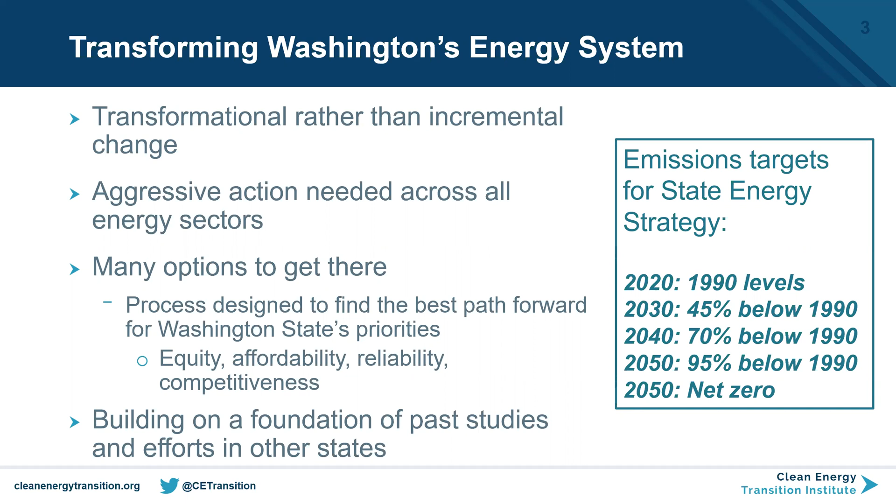It's building on a foundation of past studies and efforts in other states and also in the region and in Washington State itself. And we're using what we think are the best tools to try and explore this problem going to such aggressive targets in the future. The approach that we're taking is using conservative assumptions about existing technology from public sources. So our design philosophy there is not to be trying to factor in a lot of different technologies that are unproven or we think may come down the pipeline in the future. Instead, we're taking projected costs of technologies that exist today and using those to forecast what we might invest in the future.

We're exploring how Washington can achieve deep decarbonization in all energy sectors. So this is looking across all of those traditionally segregated or siloed sections of the economy in terms of planning, and thinking about this holistically. What do we need to prioritize? What do we do in different areas of the economy? We're using an optimal investment model. So how do we minimize costs while meeting the objectives of different scenarios?

And we are looking at the model interaction with other states. So how does Washington make decisions in the context of the Western region and in the context of the West making moves themselves towards deep decarbonization or high renewable systems?

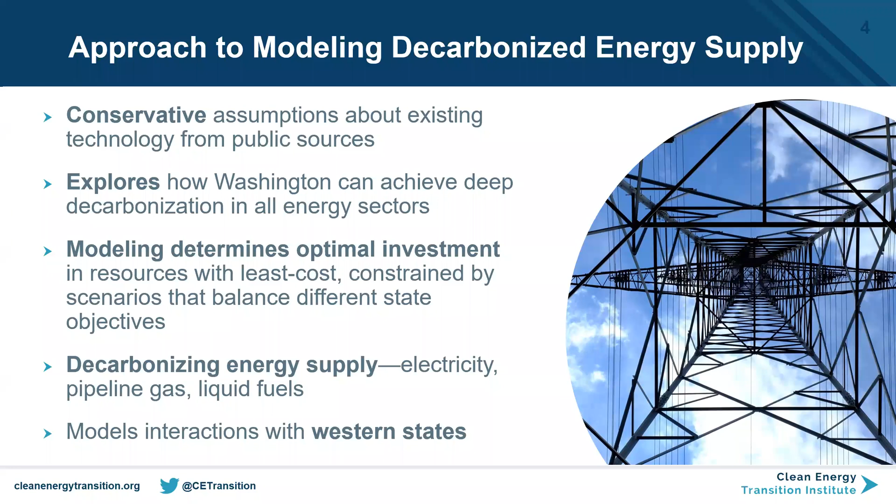There's a lot of studies that have already been done in decarbonization, both in the US, in the Northwest, in Washington, and internationally. And this has been a process of development of understanding the different elements of decarbonizing our economies and learning from that past work on what types of strategy might be appropriate to get to these goals in the future while meeting the objectives of different planning entities, of different states, of different countries.

What we see when we look at the literature out there, and the Clean Energy Transition Institute has a review of 58 different studies. Jesse Jenkins at Princeton reviewed 30 different studies, and subsequently there have been a number of studies done since those reviews. What we see across all of them are commonalities in the types of strategy, the types of action that we might take to achieve decarbonization in the future. Just looking back from Jim Williams' paper published in Science in 2012, energy efficiency, generation decarbonization, and electrification were three key pillars of reaching a decarbonized future.

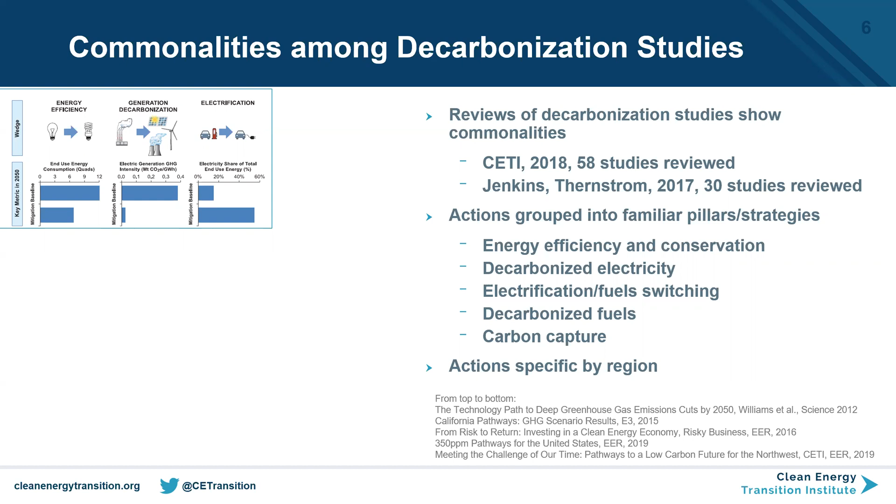California E3 GHG scenario results in 2015. We see the same sort of pillars identified there as well. Efficiency and conservation, fuel switching, which is a broader term for electrification, decarbonized electricity and decarbonized fuels. Then Risky Business study in 2016, we see the same thing. The 350 ppm study looking at how the United States might get to 1 degree warming by 2100. Again, those same pillars, but with carbon capture now.

And then for the Northwest, the Northwest Deep Decarbonization Study, we see the same kind of pillars, the same strategies coming up again. So this is something that across studies, there's some relative agreement about the areas that we need to focus on to get to these decarbonization goals. But depending on the region, the focus changes depending on what the resource potentials look like, what policies look like, what loads look like, and how we expect those to evolve over time.

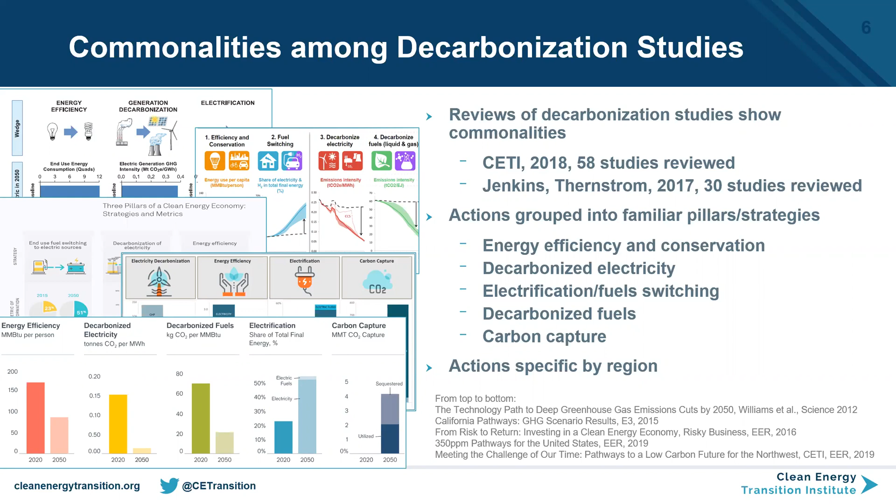So reviewing the planning framework, this is going to be material familiar to people that saw the previous workshop presentation. Why model the future energy system? What value is this giving to us when we're thinking about developing a state energy strategy?

We're developing a tailored analytical approach for Washington State, looking at least cost energy system planning and policy action design. And those really complement one another, because the least cost energy system planning can guide the policy and action design, making sure that we are on the right path towards that future that we want.

One thing that I think is often misinterpreted in this type of definition is least cost. I think that people instantly go to thinking about this in terms of, okay, we're throwing out everything apart from our economic objectives here, potentially at the expense of other objectives in the state or in the country. Really, least cost is a definition of what the model is doing, but the process itself is looking beyond that. What we're looking for here in developing the scenarios and running the model is the best path as a balance of different, often competing objectives. And not all of those objectives can be quantified in economic terms.

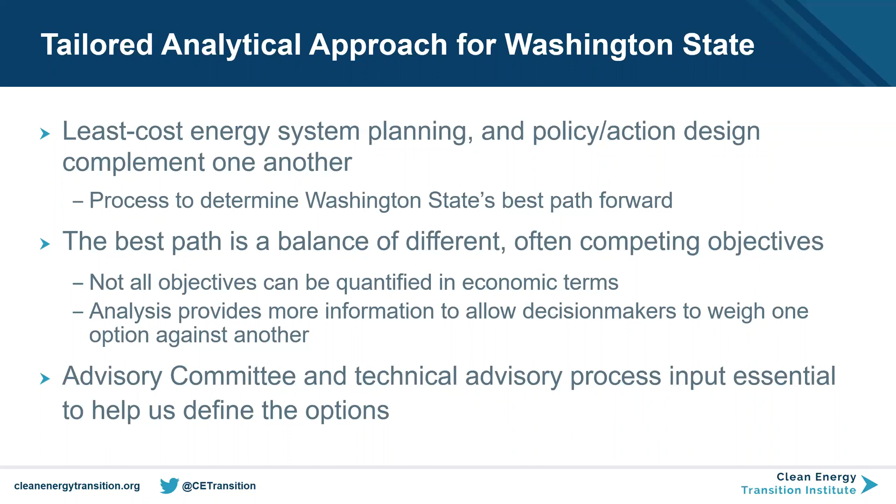And this is where the advisory committee and technical advisory process is essential to help us define the different options for the state and define those scenarios that we want to explore that are going to best inform policy and action development.

There are three framing questions which help orientate us to what's going on with the model, what's going on with policy and action development. The first is, where are we now? So where are we starting from? What is the current state of Washington's energy system? Where do we want to go? So from here, the jumping off point, how do we then move to our emission reductions goals in the future? What's the most desirable pathways to meeting those? And then finally, how should we get there? So once we've looked at what those pathways might be, we can think about what policies and actions might get us to where we want to go.

So starting from where we are now, we have Washington's current energy resources and infrastructure, and that includes the stock of all energy producing and consuming technologies in the region, patterns of energy consumption, final energy demand of fuels and electricity, the electricity system itself, all of the resources, transmission, and then fuel prices and fuel sources. And then we have policy as well, existing policy and targets through 2030, through 2050. The Clean Energy Transformation Act being an example of one of those for Washington that are already setting out goals for us to achieve in that time frame.

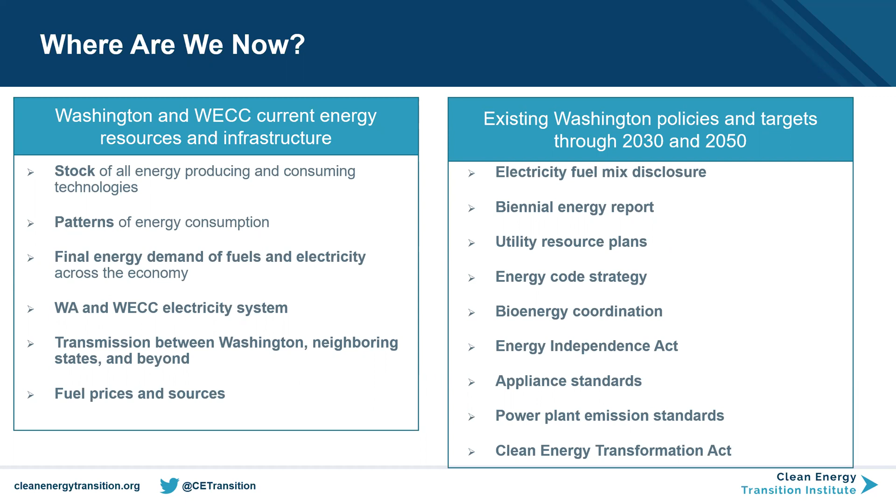Then how do we get there? This is the interfacing of modeling with the near-term on-the-ground actions we actually have to do.

Sorry, you just faded out entirely there. Okay, keep going. Can you hear me okay now? Yes, but it goes in and out, but keep going. I can try switching to a different microphone. It might be worth it. Hold on one second.

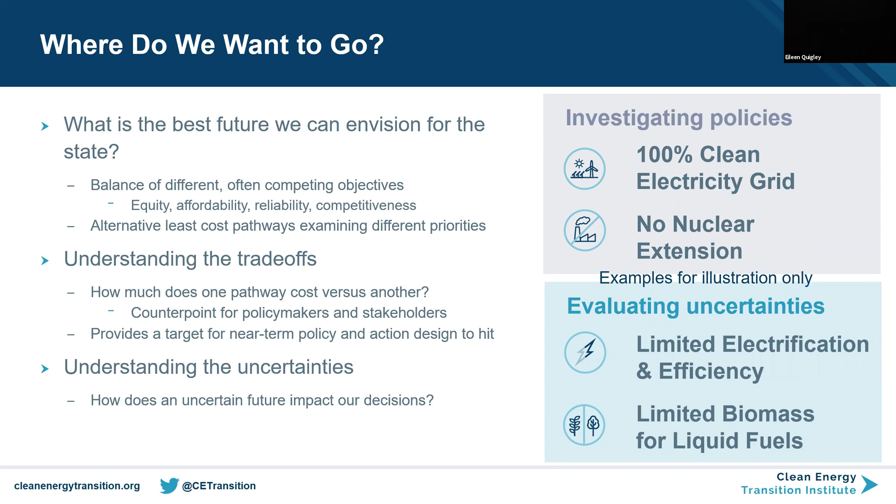The consumption patterns of the state as a whole are aggregated in our model. We're not breaking out different transmission zones, for example. But what we are doing is capturing the state as a whole in terms of technology stocks and how those will evolve over time. So if there are differences in energy consumption by region within the state, all of those are taken into account when we're building the demand for electricity, gas, and petroleum products in serving the economy.

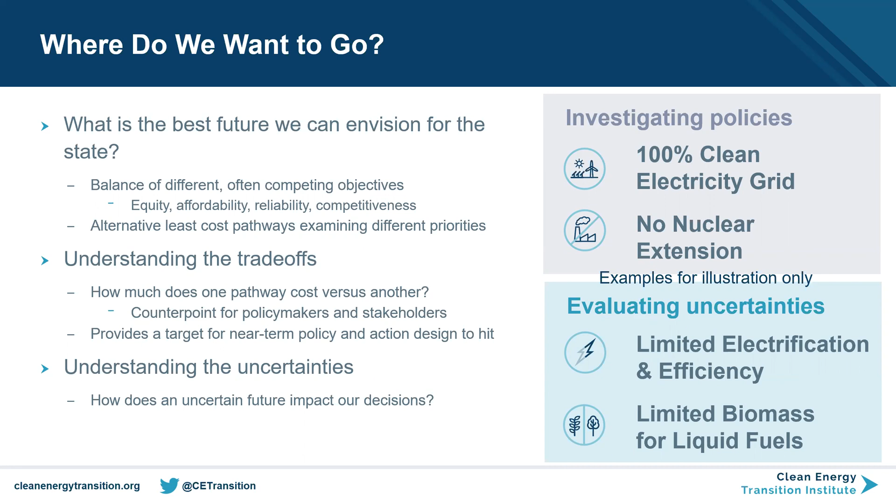Okay, let's go forward, and we'll add some more in a bit when you take your next break. So the next section here is the 10,000 foot view of what we're trying to achieve and what is the process we're following with the model.

Taking the very high level view here, what we're doing first of all is modeling Washington's economy. That's the first bucket, where we have residential, commercial, industrial, and transportation demands for energy. In this bucket, we're looking at the bottom-up stocks of all energy consuming technologies in the economy.

Your audio just paused, so repeat what you just said please. Can you hear me okay now? Yes. Okay, so we're taking a bottom-up approach of every energy consuming technology and unit of that technology in the economy to build up a picture of how much we're consuming today, and then using forecasts and assumptions about how those stocks will change over time to get a picture of what we'll be consuming in the future.

We'll get into this in the data sources section, but we're making a bunch of assumptions here about what kind of technologies people will replace their existing technologies with as they burn out. So when your water heater burns out, what kind of new water heater do you replace it with? When you're buying a new car, what kind of new car do you replace it with? That gives us this evolution of energy needs in the economy.

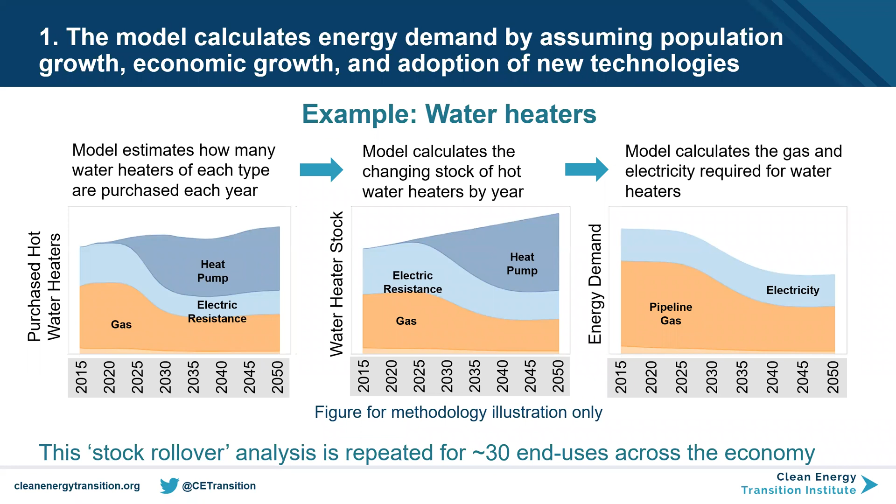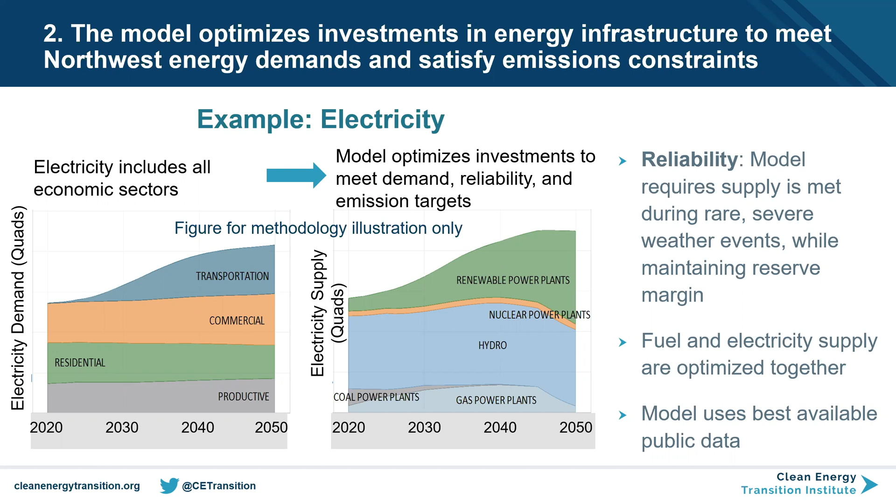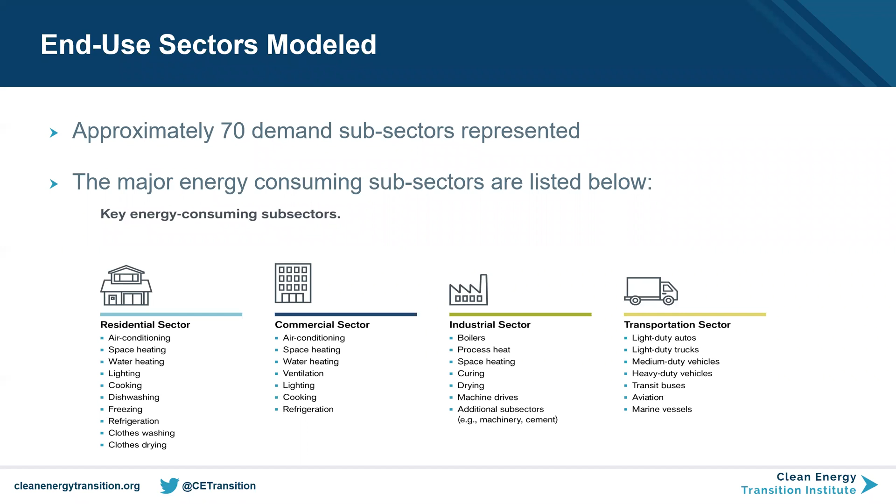The 70 demand subsectors include — well, we have a full list of them at the end of the presentation for those interested, more as a reference. But the major energy sectors are shown here for residential, commercial, industrial, transportation. On the supply side, we're looking at a variety of different resources we can invest in. A simple list of example technologies is shown for thermal: gas turbines, gas combined cycle, gas with CCS, renewable resources, energy storage.

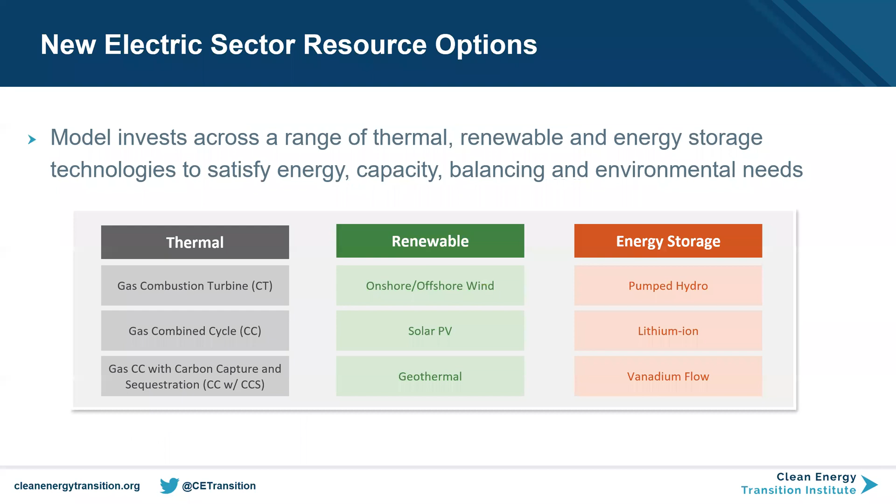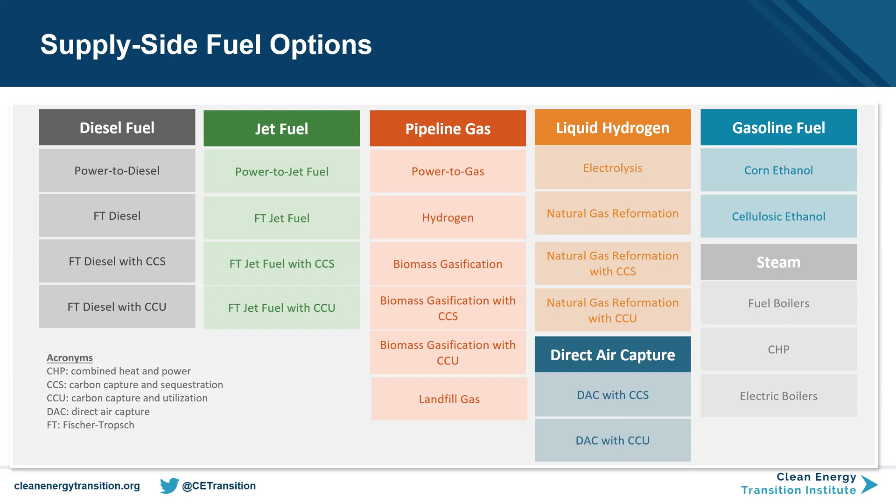Supply side fuel options fall into these buckets: diesel fuel, jet fuel, pipeline gas, liquid hydrogen, gasoline, steam. All of these have options for clean types of fuel and fuels that can be created either from biomass or synthetic production from hydrogen electrolysis in the electricity sector. We'll get into more detail about how this all links together in the next section. So I'll stop there and take any questions on that high level overview.

Okay, so from an anonymous attendee: energy resource planning at a macro level often assumes away the fact that resource decisions are made at the level of the firm, and often include previous investments. Will this be included in this modeling effort?

So this is also something that in running our models, we're kind of bypassing that step, but it's also intentional in that we are not trying to simulate the investments that would be made in a current market. We're trying to model least cost investments in different types of technology based on their costs alone and their optimal operations together. And it may not be the case that existing markets, existing incentives will produce a least cost outcome or a decarbonized future.

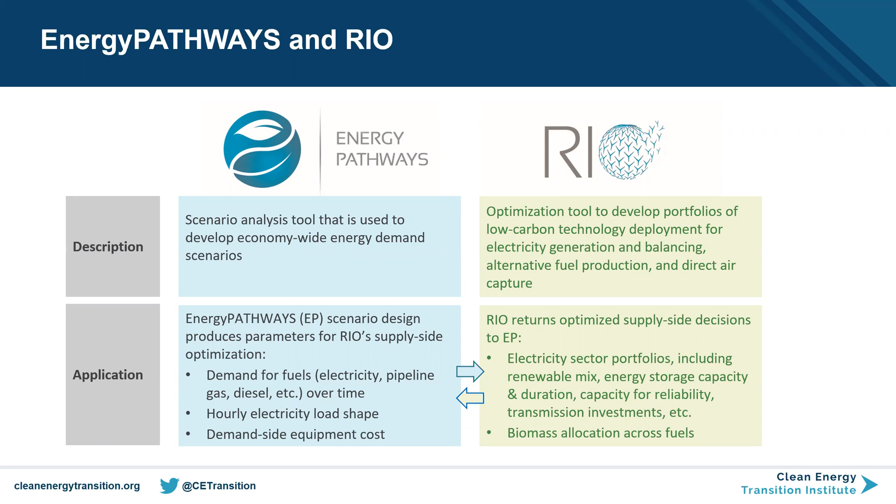To get realistic solutions to decarbonization in the future, looking at decision variables and outputs, we model on an hourly, daily, and annual basis, all part of the same optimization model, because these temporal frames are what's important for capturing the dynamics in the system and developing a least cost resource portfolio. Hourly decision variables include generator dispatch, transmission flows, operating reserves, curtailment, and load flexibility.

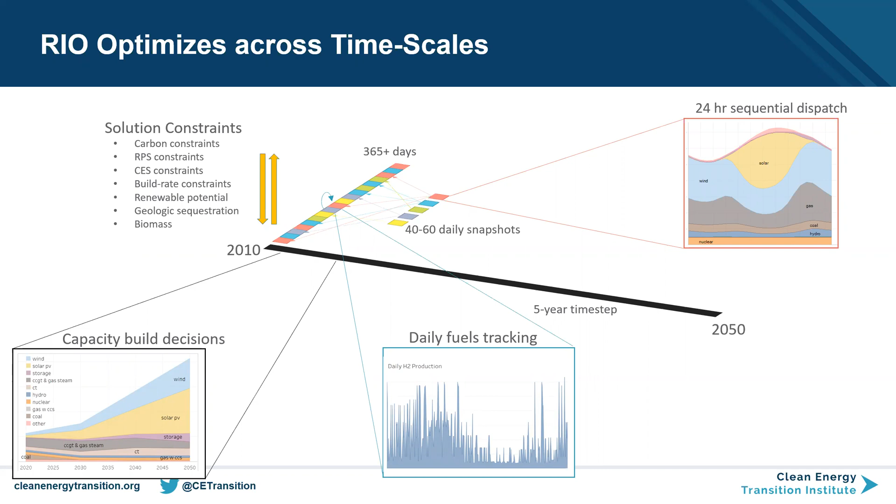We're also looking across geographic granularity as well. We represent each state in the West, the transmission constraints and potential for transmission expansion between those states, as well as the cost of doing that expansion. And then by state, we have load, resource, and new resource potentials according to the conditions of that state—the weather conditions, the climate, the loads.

So it captures the unique geographic advantages and local conditions that allow us to potentially get geographic diversity, taking advantage of, in the West here, excellent solar resource in the southwest and excellent wind resource in the north.

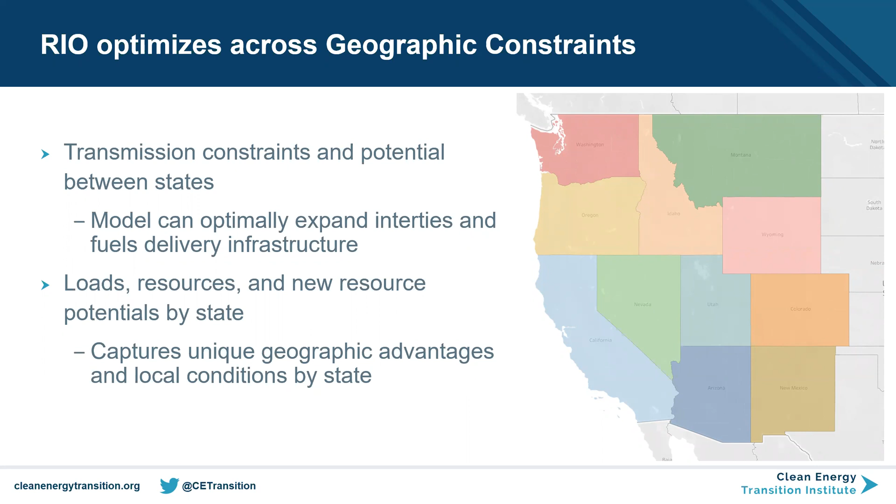We have flexible load operations. There are a number of technologies we can install in the future, replacing those that are burning out over time, that have flexible load capabilities. One of them that is very valuable to balancing the grid would be industrial boiler loads that could be shifted a little bit over the course of the day.

On the left-hand side there, we have a delay-advance flexible load shape construct, which is typical of characterizing a daily flexible load resource. This is converted into cumulative energy constraints, where we have an envelope on what we can be producing, either more or less, during every hour.

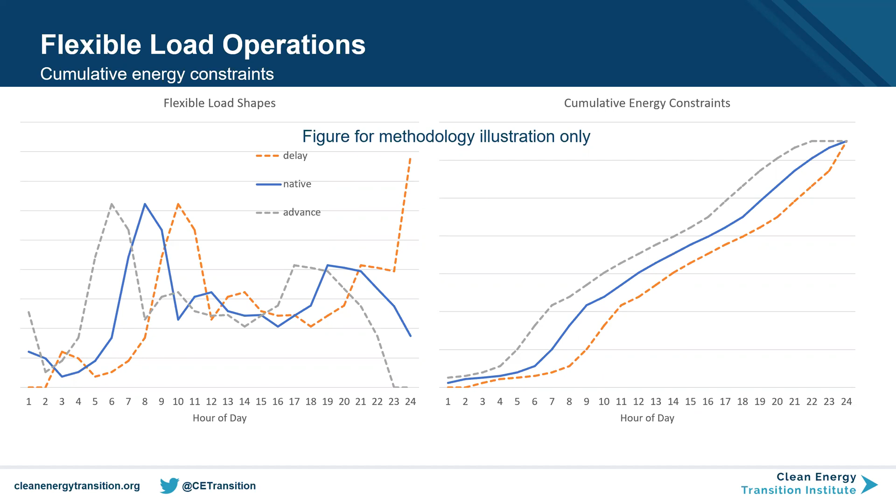And we have to meet that same energy budget over the course of the day. This is also true of longer term resources as well. We develop this flexible load envelope, and then economic generator life cycles.

If the generator comes to the end of its life, it could be economically retired by the model along that timeline. But if it gets to the end of its life and there's an option for extending the life of that resource with additional investment, then as long as energy capacity AS is still higher than the cost of that life extension, the generator will continue.

There's also the option of retiring a generator, and as long as we're within specific conditions and timeframe—say within 5 years, or whatever we define—we can repower that resource if it becomes valuable again in the future. Retirement is based on either the lifetime of the resource, or if that resource is no longer valuable and the fixed O&M costs exceed its value, then the model will retire it.

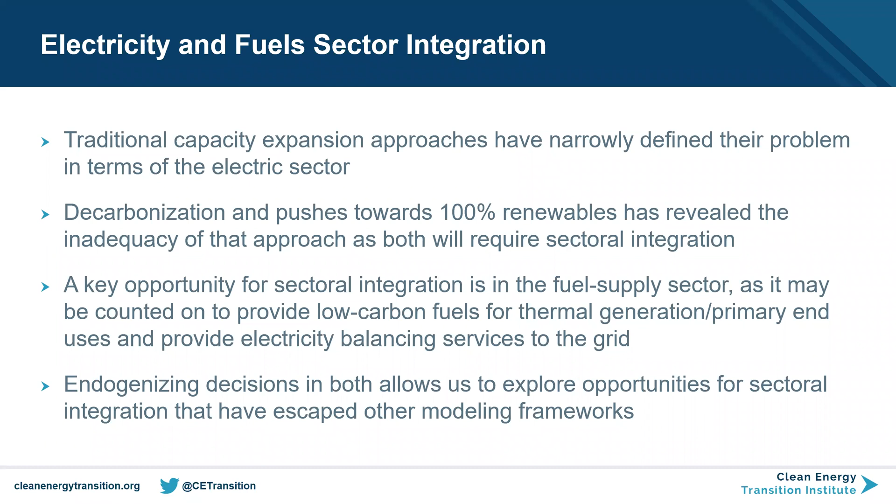Daily energy imbalances look something like this. On the left-hand side, conceptually, we have load peaking in the evening and renewables peaking in the middle of the day. This is the inconvenience of renewables—we can't match the production shape exactly with our load. This already happens in a variety of different regions that have installed a lot of renewables. We need to disconnect instantaneous load and supply.

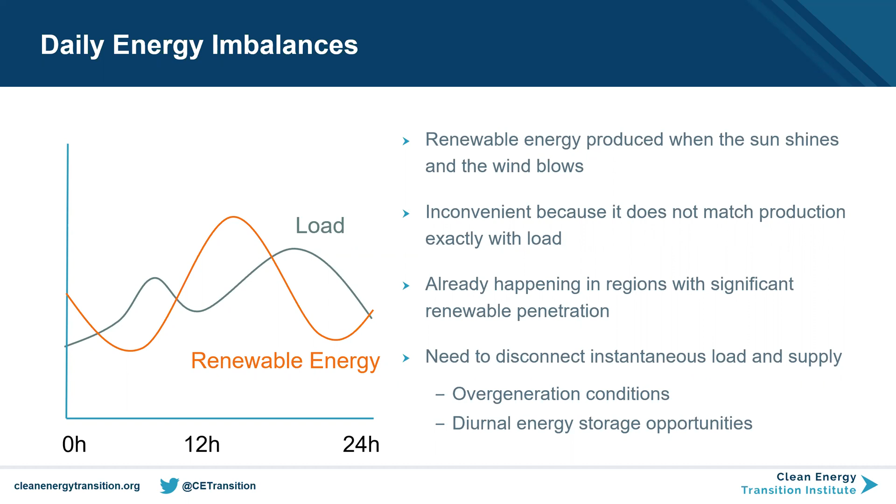Currently in this shape we have overgeneration conditions and energy deficit periods, which are opportunities for installing storage. Lithium-ion batteries are a solution to this. We can also try to shift our load toward the renewable shape using flexible loads. This also happens over a longer-than-daily time period.

This happens more and more as we decarbonize our system and build more renewables. The charts at the bottom show, for the Eastern Interconnect, a simulated 40% solar, 60% wind system where our load and renewable energy are equal. Load is shown on the positive side of the chart on the left, and you can see load is higher in the middle of the year and lower in winter. Renewables—harder to see—are shown as variable renewable production in the orange chart at the bottom. If we subtract renewables from load, we get the cumulative net load, with surplus energy in winter and energy deficit in summer.

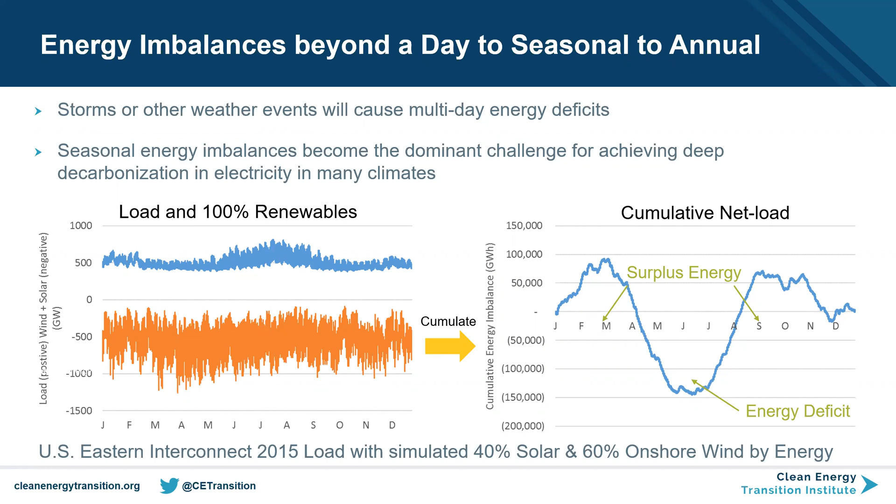So this is the year-by-year seasonal weather condition that influences how much energy is available at different times of the year. We have a variety of ways to deal with this, and it depends on the cost of various different solutions.

The first one is clean energy mix—we could build different amounts of solar and wind, which may more closely approximate our annual load shape. We could build battery storage or long-term storage. We could build dispatchable generation to inject energy into periods where we have an energy deficit. We could build transmission to take advantage of geographic diversity and level out the imbalance between load and renewables. And then we have flexible loads.

Flexible loads are typically thought of as a diurnal resource where we can shift air conditioning loads or boiler loads, but flexible loads extend to large industrial loads as well. One of those large industrial loads that's potentially a very valuable resource in the future is production of fuels.

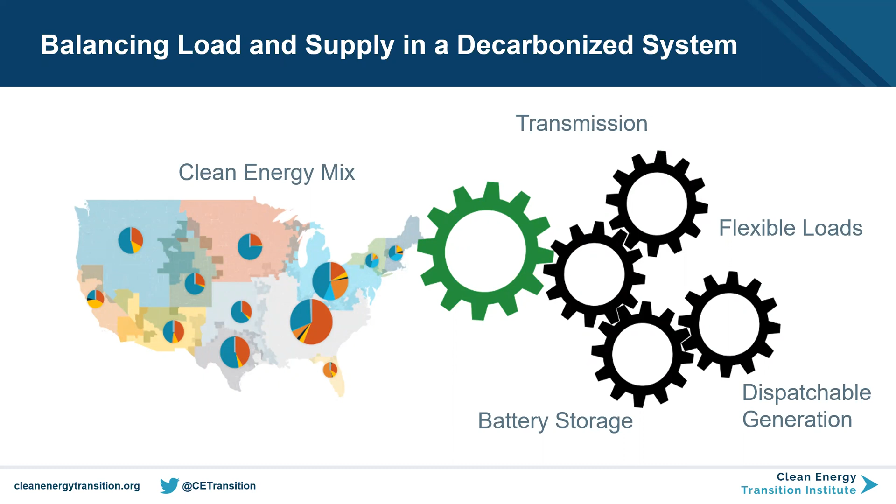We have to decarbonize our transportation sector and other sectors that use fuels as their primary energy source. One way to do that in harder-to-decarbonize areas is to decarbonize the fuels they use. So flexible loads can do double duty here: they can help balance our electricity grid, and they can also help us avoid having to buy fossil fuels in primary fuel use parts of the economy.

So what RIO does is optimally invests in fuels transportation, storage, and conversion infrastructure. This is a simple high-level diagram of the fuels component of the model, where a blend fuel is something like pipeline gas that is used for demand from electric generators. It's used for demand for fuel conversion processes. So this could be hydrogen, for example, and hydrogen is then converted into synthetic methane or synthetic liquids. And it also serves exogenous demand.

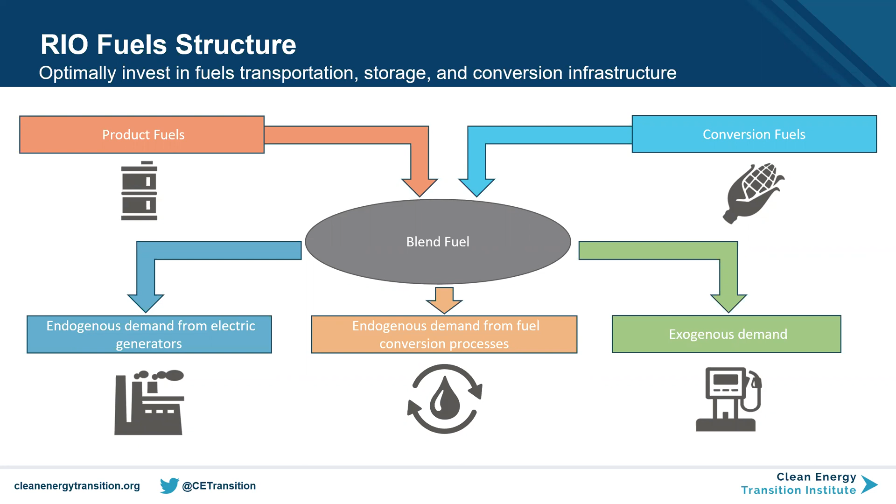So each step of this fuels process has some infrastructure associated with it. It has storage, transportation costs, and all of those are represented in the model so that we can build out optimal portfolios of fuels infrastructure alongside the electricity system and get to that least cost or best pathway to decarbonizing the energy supply side. And what that leads to is an integrated supply side between electricity and fuels, where conventional balancing might not be the most economic option. And we're now extending electricity into fuels production.

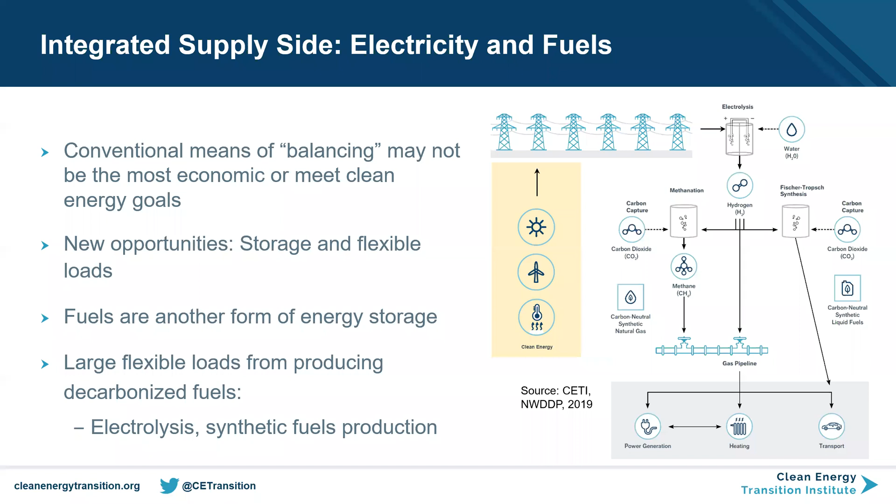The right-hand side diagram here is from the Northwest DDP study, where we have electricity production going to electrolysis, producing hydrogen, and hydrogen could have taken one of two paths in that study, either methanation or Fischer-Tropsch to produce synthetic liquid fuels, and that fed back into the economy and can decarbonize different sectors in the economy. So I'll pause there and open up for questions before diving into reliability.

Okay, from Dan Kirshner, does the model consider technologies like gas heat pumps and micro CHP, combined heat and power? Yes, so those are represented in the model. The degree to which we adopt them as new technologies in the future is based on an assumption. And so exploring scenarios that include those technologies would be a design choice in scenario development.

Great. From Clay Norris, is transmission expansion in the model constrained by the decades-long process to get it built? That's a great question. And that gets back to what I was discussing in the introduction section, where there are potentially things that we would like down the road that could reduce our costs of our future decarbonized energy system. One of those is transmission expansion. And transmission expansion often takes 10, 15 years to get a new pathway developed. And so if we've identified transmission expansion that comes in 2030, 2035, that may be something that we want to consider getting a head start on in current planning cycles, because it takes so long to get through that process.

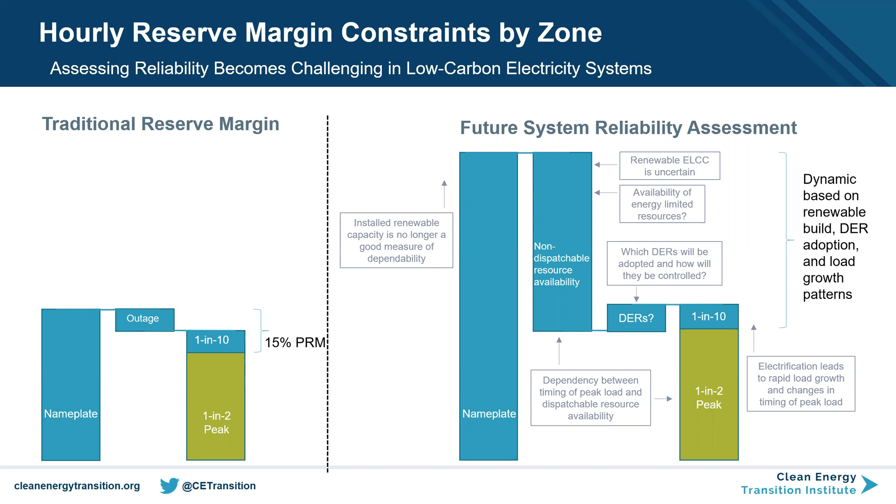So what we have done to address this in our model is to basically run a planning reserve margin requirement on every single hour of the year. And that allows us to make sure that there is enough dependable capacity online and able to contribute during every different type of condition that we might encounter.

The key to this is that the contribution is based on the dispatched energy for resources that are energy constrained. So things like storage only contribute their dispatched quantity in each hour. If you have a lithium-ion battery that has a 6-hour duration, it can contribute for 6 hours, but once it's out of charge, then it no longer contributes any dependable capacity towards the system. And so that allows us to capture that energy constrained dynamic in building out a reliable system.

What we're factoring in here is demand side variations. So we gross up the load to higher than the sampled load in the model to account for load variations that we might not have in our data set. And then supply side availability, we're looking at outage rates, renewable resource availability, energy availability risk, which is what I just described as energy limited resources, and single largest contingencies. So we're using multiple years in the day sampling to add robustness. Our day sampling is looking for the worst conditions in the data set.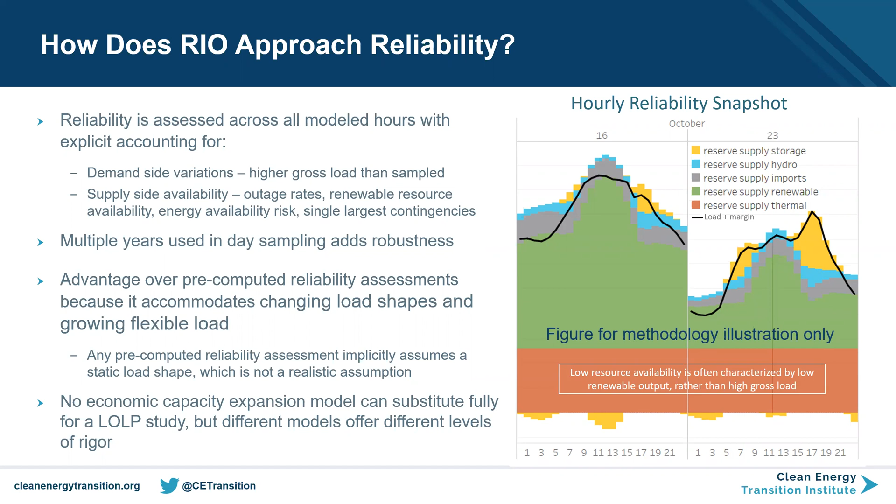This calculation is really dependent on how we derate every resource. What we do with loads is we scale them up to 106% of the load. Thermal resources, we derate them 80 to 95% just based on their forced outage rate. Renewable resources, 70 to 90% of hourly production. So this is hourly production in periods when we have very low renewable output already, say 10% of nameplate. We're derating that a further, say 30%. So we're taking 7% of nameplate as the contribution.

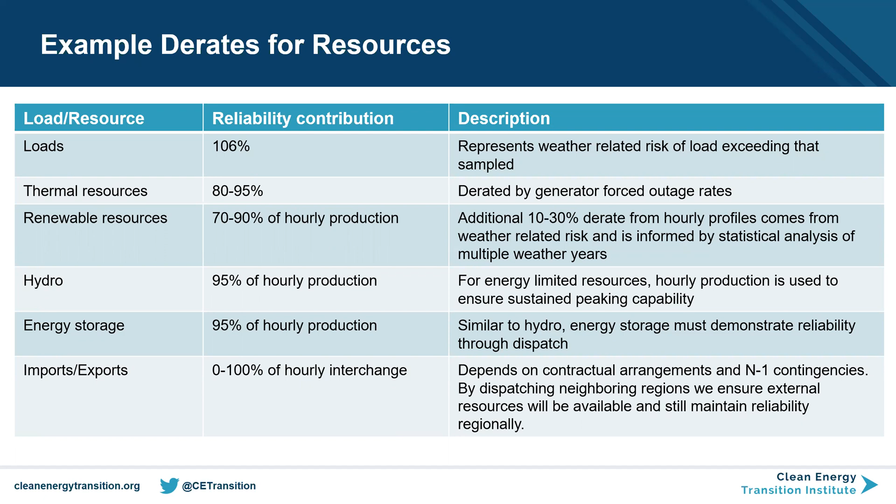Hydro, 95% of hourly production, energy storage, 95%. And imports and exports are dependent on contractual arrangements and N-1 contingencies. So those are set depending on the transmission connection. So I will open it up for questions on reliability.

There are none in the window at the moment, so I would keep going since I see where we are and where I know we have to go. So keep going.

Okay, so next section is kind of a reference section. There's a lot of information in here, and I'm not going to go through it all, but I'm just going to guide through where people should be looking. So first, on demand subsectors, this is the full list of the 67 subsectors that we're modeling in Energy Pathways.

And the primary data sources we're using to build out this database include the Annual Energy Outlook 2020 inputs and outputs from the EIA, the residential, the commercial buildings, and the manufacturing energy consumption surveys from the EIA. So how much each of those sectors and technologies associated with them are consuming. And the State Energy Data System, SEDS, to look at hourly profiles of consumption in different demand subsectors. And then the data that NREL provides on the demand side as well.

We have 363 demand side technologies with projections of cost, capital installation, fuel switching, O&M, and service efficiency. Then for load shapes, what people are consuming, these are the sources for various different regions. So bulk system load, FERC Form No. 714. For the load shapes for all of these different technologies, we're looking at the Northwest Energy Efficiency Alliance stock assessment for the Northwest. In other regions, we have different sources like California Load Research Data for California, EPRI Load Shape Library.

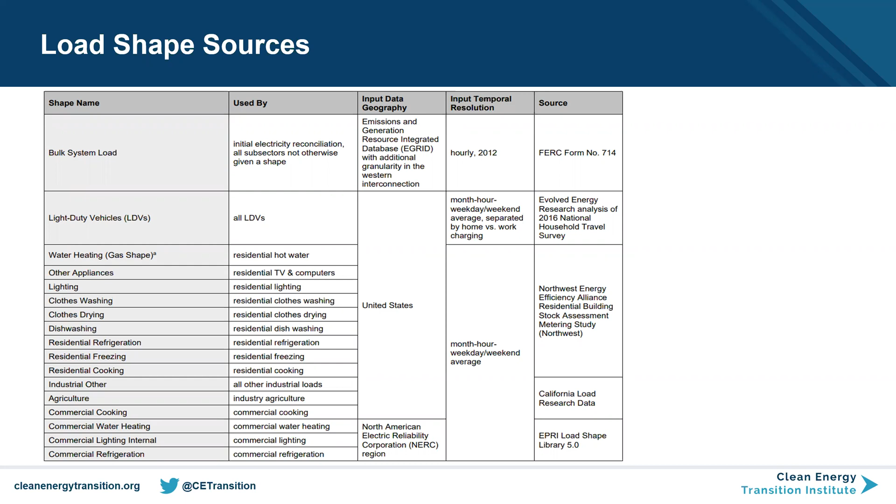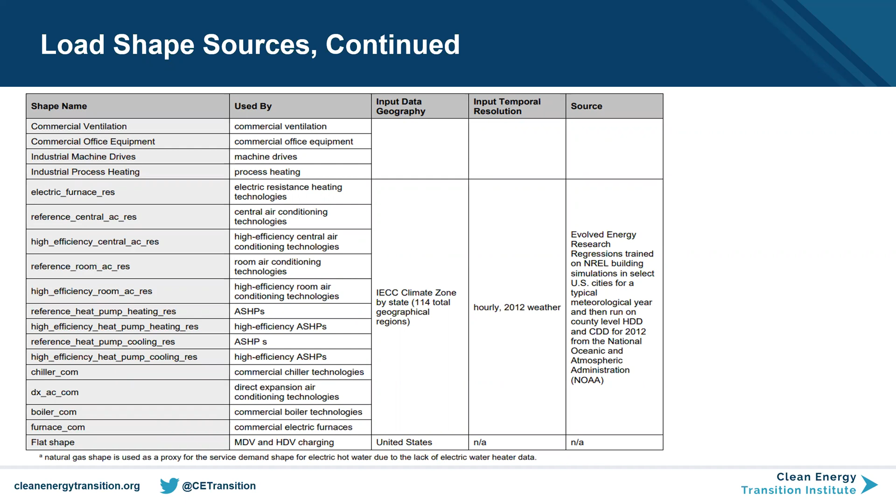Then looking at residential side, AC, air conditioning, heating, heat pumps, etc. This is all also sourced from NREL and using weather data from NOAA. And then on the supply side, we have data characterizing resource potential, product costs, delivery infrastructure, and technology cost and performance. And there's a variety of sources here. The dominant sources though are from EIA and from NREL. So the technology cost and performance for various different types of electricity resource we can build are mostly sourced from the NREL Annual Technology Baseline.

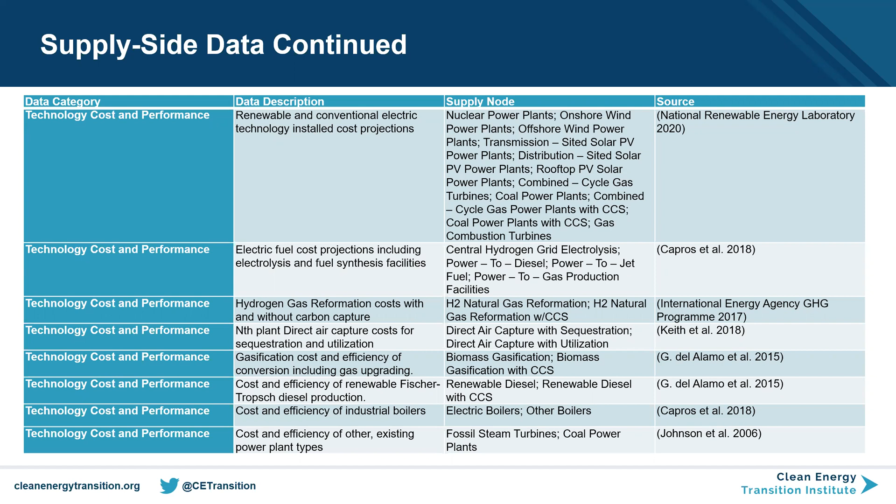One thing that is important to note here is that the various assumptions that we have on how loads will evolve and technology adoption are based on forecasts that are prior to COVID-19. And there's this question of impact on our study assumptions. How should we factor this in? What are the impacts long-term versus what are the impacts short-term? There's going to be changes to near-term adoption rates of new technologies. So what kind of shift should we make to the data to incorporate that?

There'll probably be impacts on consumer spending for new appliances, vehicles. Will this accelerate action later? Will it delay electrification? Will there be opportunities for economic development in a post-COVID environment? Will there be stimulus to stimulate development in different parts of the economy? And there'll be an impact on fuel prices. We see the major impact on oil prices currently based on the supply and demand imbalance. How is that going to play out over time? How do we see that impacting forecasted fuel prices going into the future?

So I'll stop there for questions if there are any on that section. None at this time. Okay.

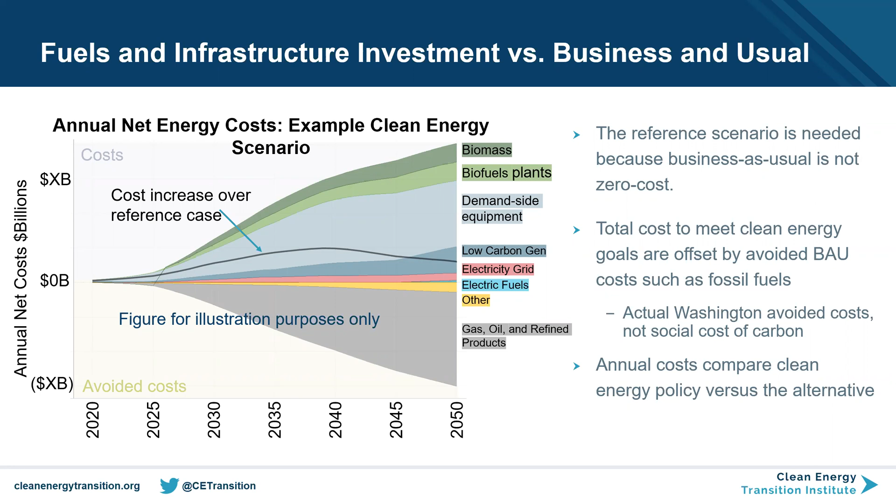The difference between the summed positive and summed negative side is the black line, and that's the net cost increase over the reference case, which is what we're using to both assess the cost of decarbonizing and also assess one scenario or pathway against another.

So what we'll see coming out of the analysis when we're running various different scenarios is contrasted costs that give us that economic counterpoint we talked about earlier for each one of the scenarios developed to represent different policy directions for the state. It's not necessarily that we're looking for the lowest cost option here. This is getting back to comparing or trading off different objectives in the state. This will allow us to put a dollar value to the costs or benefits of following a particular policy action versus another.

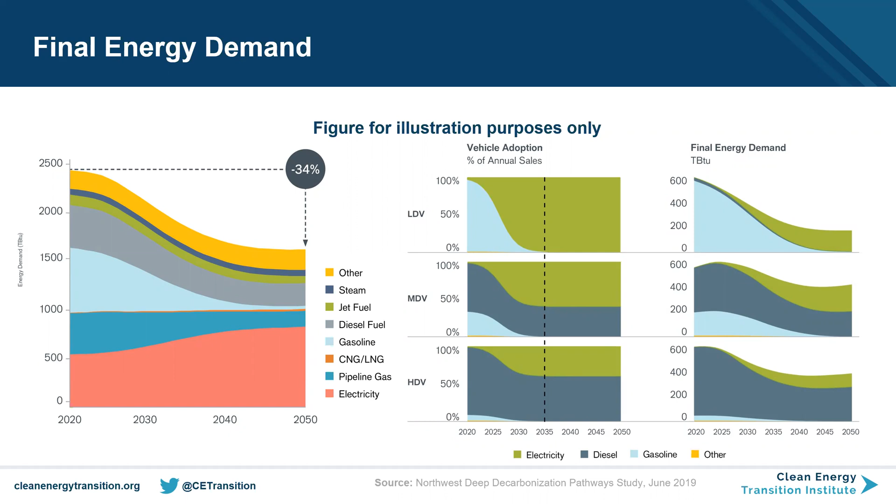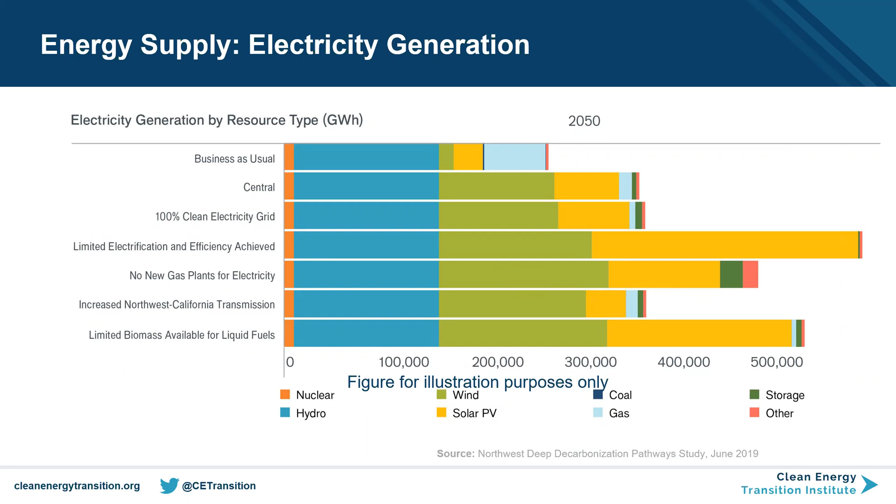And then electricity generation for each one of our scenarios will have different energy or electricity mixes in terms of generation. That will feed into policy and action development on how we actually achieve that. What are the barriers to accomplishing that development of the electricity sector, and what types of near-term action will facilitate that development in the future.

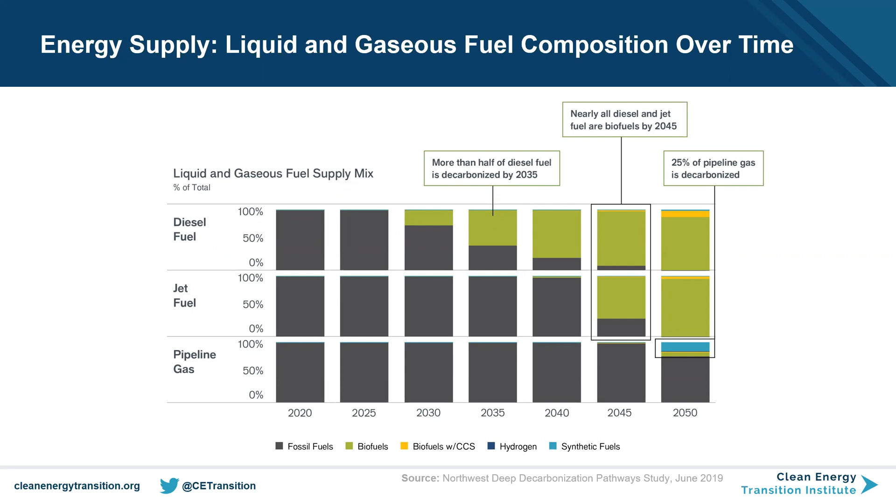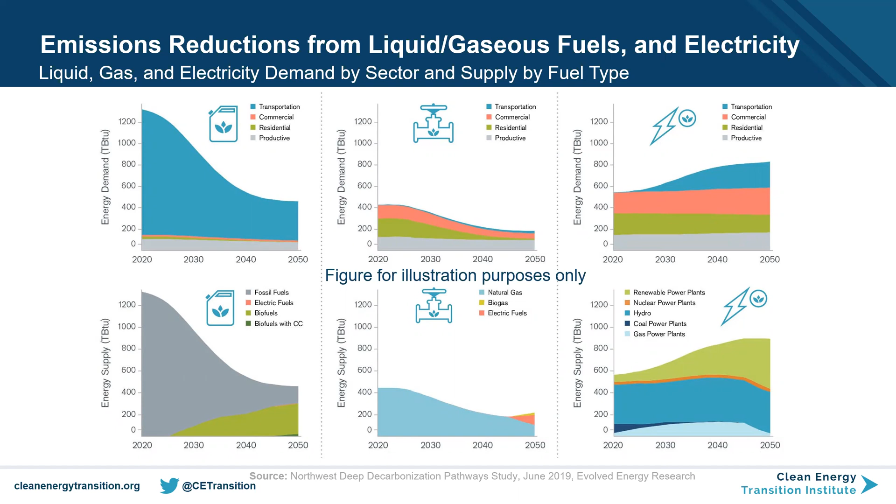And again, this is just an example pulled from the Northwest DDP study. We'll be building specific Washington state scenarios to look at the questions that we come up with or address through scenarios in the next workshop. And then finally in this section, cost impacts by sector, we can look at how much is being spent in each of the sectors by scenario.

Any questions on that section?

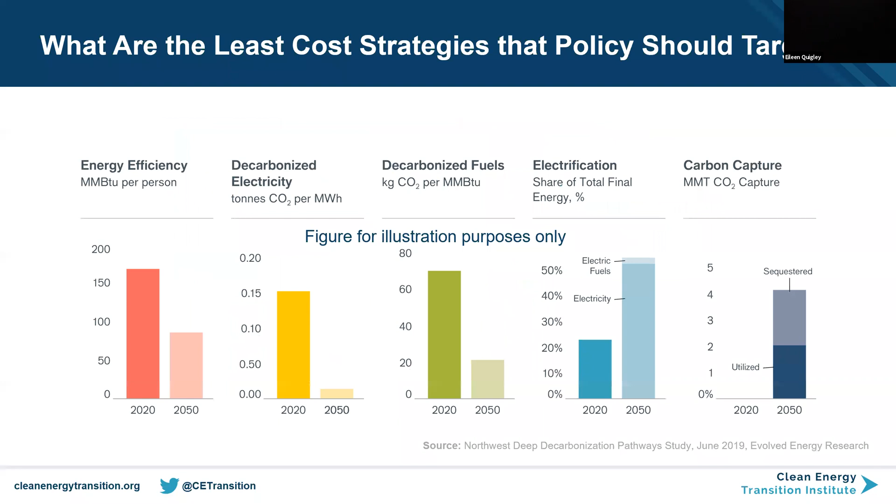So this chart, I'm assuming - sorry, can you repeat the second half of the question there, Eileen? So given the changes in the petroleum economy, can you comment on the assumptions on the fuel costs out to 2050?

Yeah, so this is quite an important assumption from a cost perspective, total cost of decarbonizing the economy. The cost that we avoid in buying these petroleum products is kind of a key component of how much that net cost is versus business as usual.

The current events, COVID-19 and reduction in fuel prices, we need to think about how that impacts fuel costs long term, because long term is really what's important in looking at these kind of comparisons. From what I've seen in forecasts, at least the futures market for oil are recovering costs to pre-COVID levels by about 2022.

But suggestions on what we could incorporate into fuel price assumptions, fuel price scenarios would be welcome. The other piece of that is that in history, fuel prices have been very volatile. And so we can look at what the cost ranges look like from a historical volatility perspective on total cost. But one of the potential advantages of decarbonizing the economy is that it kind of acts as a fuel hedge, in that in the past we've had this great uncertainty about how much we're paying for energy. With a high renewable system, we basically reduce that variance, and so there's an element of that fuel hedge in building out a larger renewable energy economy.

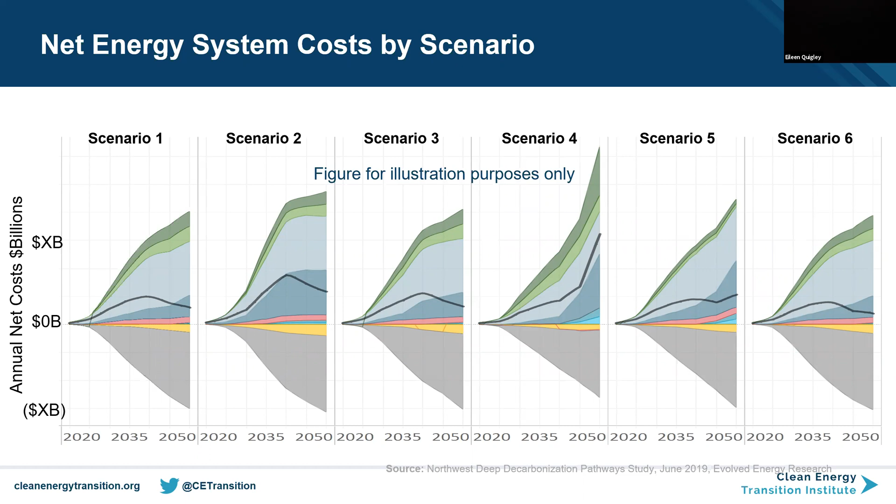Great, thank you. So at the moment, there are no other questions in the box, so we can move to the last set. Okay, so final section here, this is just a look ahead to the next workshop and to tee up some of the things that we'll be talking about there.

The first is the reference case. This doesn't meet the GHG targets. And by building this reference case and looking at the other decarbonization scenarios, we're asking the question, what would Washington do differently when meeting clean energy goals versus the status quo? There are a number of policies that are already in place in Washington, and CETA is one of the most impactful ones there, where our reference case will achieve the existing policies and hold them constant through 2050. We'll be achieving 100% clean electricity by 2045 in Washington.

Then thinking about what scenario development means and investigating the state objectives. There are a lot of different policy constraints, assumptions, emissions constraints, etc., that go into defining a scenario. And our goal is to translate state objectives and potential policy pathways into constrained scenarios. So different types of policy, we try and translate them into assumptions about adoption of different technologies or constraints on how the supply side might be built out. And that helps us understand the trade-offs. How much does one pathway cost versus another?

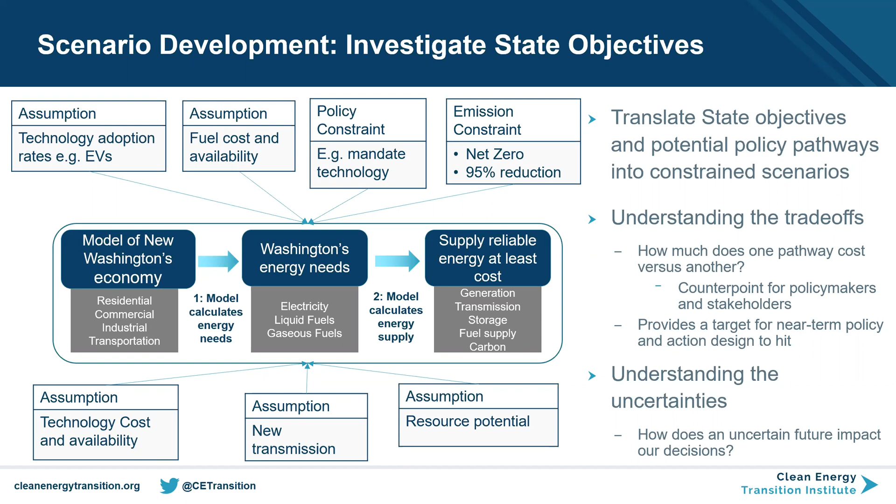Provides this target for near-term policy and action design, and helps us understand those uncertainties if we're looking at, say, different potentials for building out renewables in the state. How does that impact the near-term decisions about what we invest in? Those kind of questions can be explored in designing our scenarios.

In the next workshop, we'll be breaking down those components of a scenario and looking at what we're assuming in different straw man or proposed scenarios to investigate different policy or pathways. And these will be designed to incorporate feedback from initial discussions with the advisory committee, feedback from prior state proceedings on decarbonization. We'll summarize what the purpose of each scenario is and review the assumptions, and talk about how that interfaces with policy and action development.

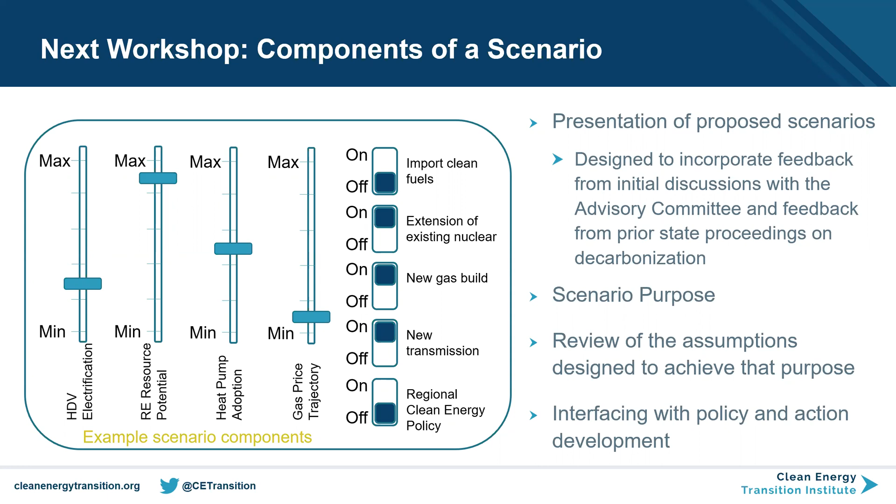And then finally, I just want to touch on what happens after scenario development. So we'll be looking at running all of the different scenarios, developing these least regret strategies. What do we need to do in the near term? What kind of actions do we need to take to accomplish these goals in the context of decarbonizing over the long term? And that feeds into the policy development process, that question from up above, how should we get there, and creation of the state energy plan.